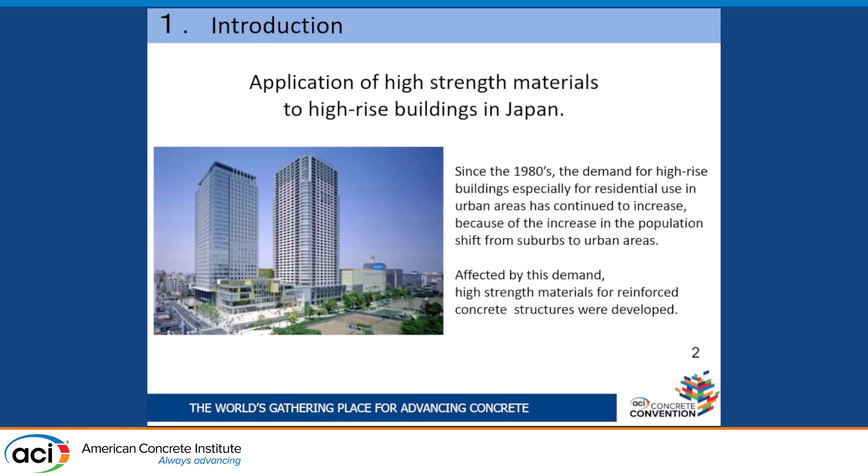I will explain the background of using high strength materials in Japan. Since the 1980s, the demand for high-rise buildings, especially for residential use in urban areas, has continued to increase because of the population shift from suburbs to urban areas. Affected by this demand, high-strength materials for RC structures were developed in Japan. This building, I designed about 20 years ago.

A national research project we called New RC was carried out from 1988 to 1993, and this chart shows the target at that time, the concrete strength and the specified yield strength of longitudinal bars. The New RC project promoted the design and construction of high-rise buildings with high-strength materials.

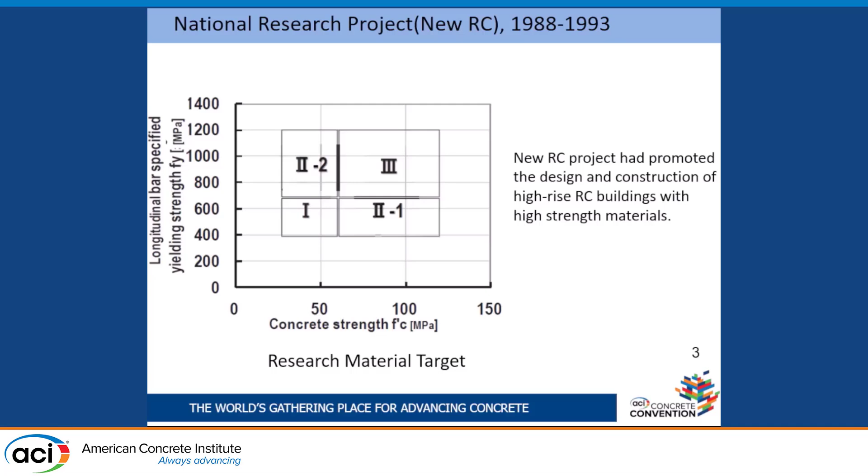This shows the history of high-strength concrete. In our company, Taisei, in the 1980s, the maximum strength of concrete was just 36 megapascal. But after the New RC project, the maximum strength went up, and in 2000 we attained 100 megapascal concrete, and also 200 megapascal, and finally 300 megapascal concrete was achieved.

But 200 or 300 is very expensive. So in Japan, usually around 100 to 150 is used for residential buildings, for the lower part of columns. At this time, big companies in Japan competed on the strength of concrete. Our company and another company competed over which company attained the maximum strength. Finally, both companies had experience with 300 megapascal. So the fight was over.

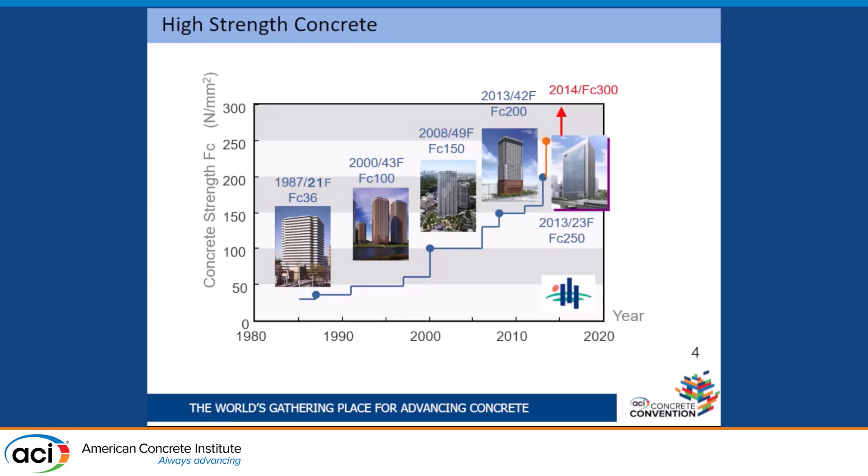This is a chart of high strength steel in Japan. Large diameter rebars with strengths of 390, 490, 590, and SD 685 are used for main rebars here. And PC steel bar and SD 785 are used for lateral reinforcement here.

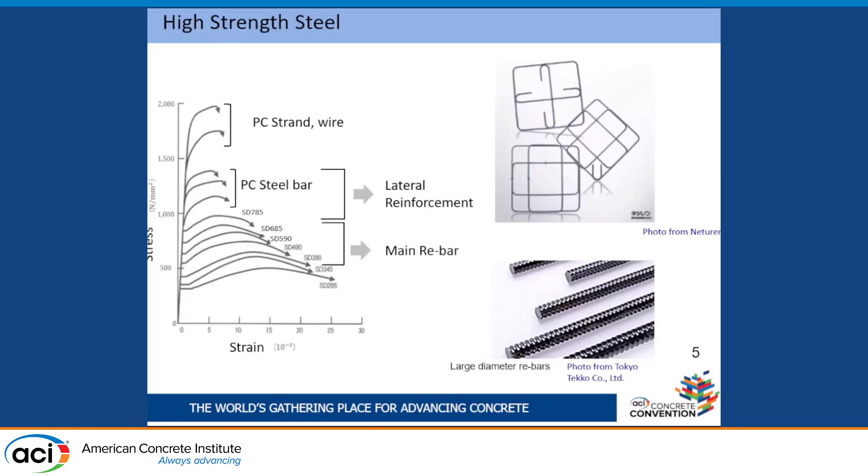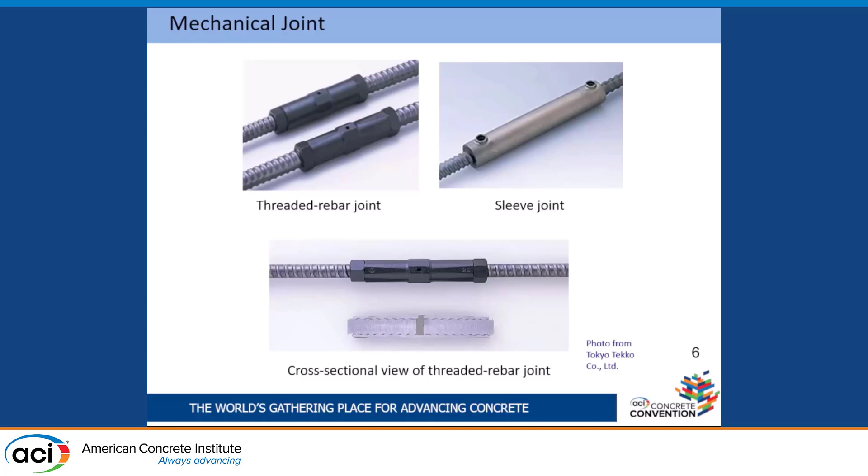When we use a large diameter rebar, we usually use a mechanical joint. There are two typical kinds of mechanical joint. One is the threaded rebar joint. This rebar is threaded, and this is a section of the threaded rebar joint here. And also the sleeve joint is here. I think the sleeve joint is also common in the United States. But in Japan, we use mechanical joints a lot.

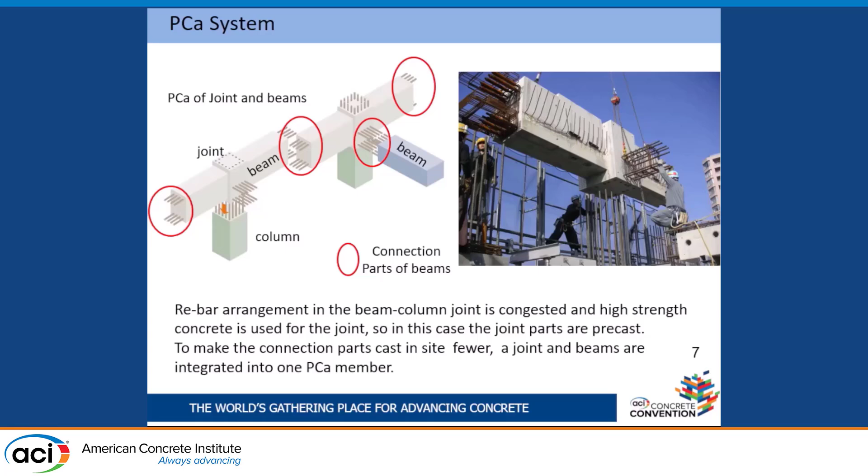Next, I will explain a precast system in the building field. Rebar arrangement in a joint is often congested, and high-strength concrete is used for the joint. So in this case, joint parts are precast. And also, to make the connection parts cast in site fewer, a joint and beams are integrated into one precast member. This is one precast member, and this picture shows the precast member about to be set here, and this is a hole, and then we pour cement grout here.

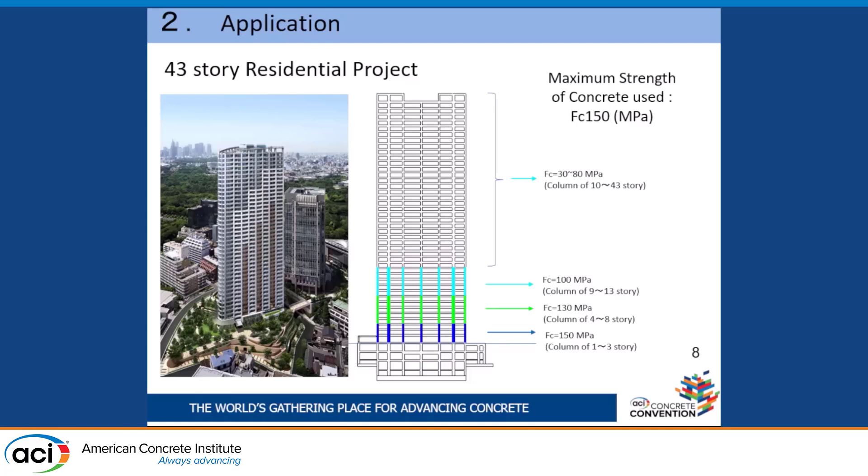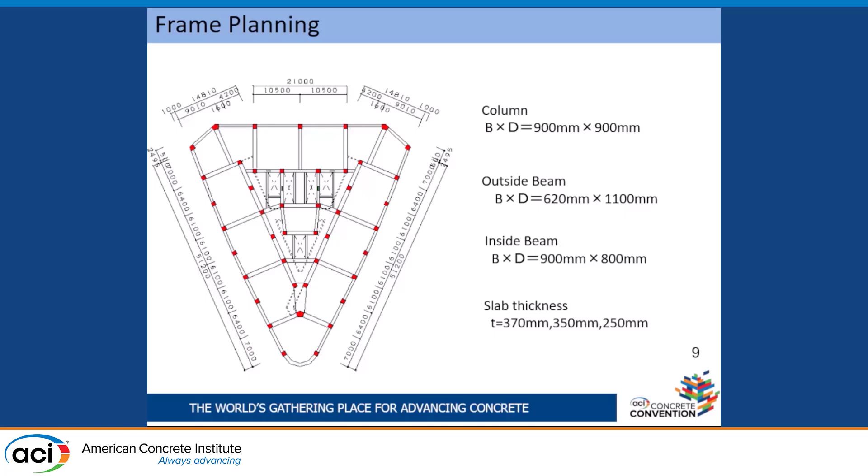This is the frame planning of this project. These are the residential areas. To make the residential area spacious, the span is wide, and the depth of the inside beam is limited to 800 millimeters, and instead the depth of the outside beam is 1,100 millimeters in order to make the frame stiff. This is a chart of the detail of the beam-column joint. To avoid congestion of reinforcing, we use a large diameter rebar with high strength.

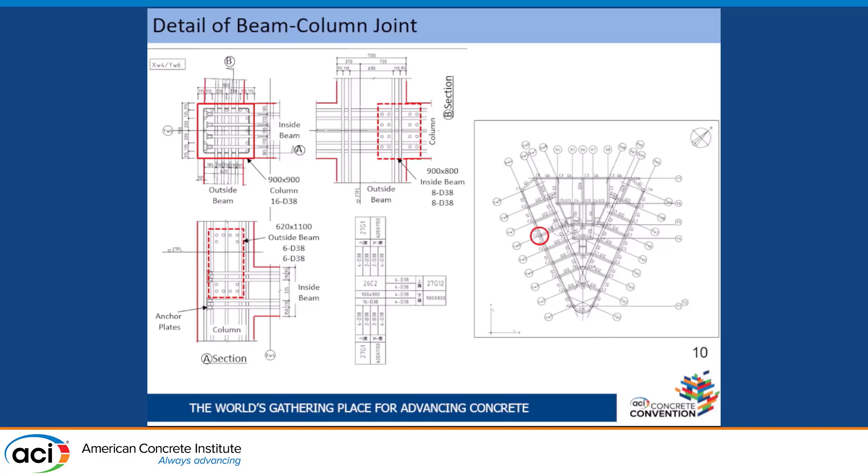So next I will explain the seismic design. The performance-based seismic design was conducted using pushover analysis, that is static nonlinear, and dynamic analysis. A 3D frame model was used for pushover analysis, and a lumped mass model is used for dynamic analysis. This chart shows the result of static analysis and dynamic analysis. The skeleton curve of the blue line shows the relation of story drift and story shear force of each story. And the dot shows the maximum response of story drift here.

We use 6 kinds of excitations of earthquake of level 2. Level 2 has a return period of about 500 years. So we check this value, and this value is less than 0.01. This is the criteria of level 2. So the criteria is satisfied. And the black one is a recorded excitation, and the white one shows the artificial earthquake.

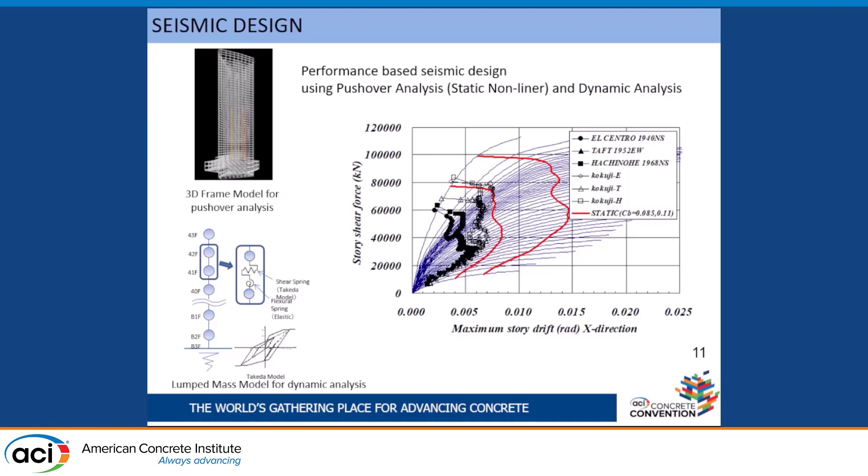So finally, I would like to introduce the recent innovative research and application about seismic performance technology. Generally speaking, if the column is not enough stronger than the beam, the joint will be damaged before the strength of the frame is attained. Here, the strength is almost the same, column and beam. In this case, the joint might be damaged like this. To avoid this damage, the column should be much stronger than the beams, but in this case, the dimension of the columns will become larger.

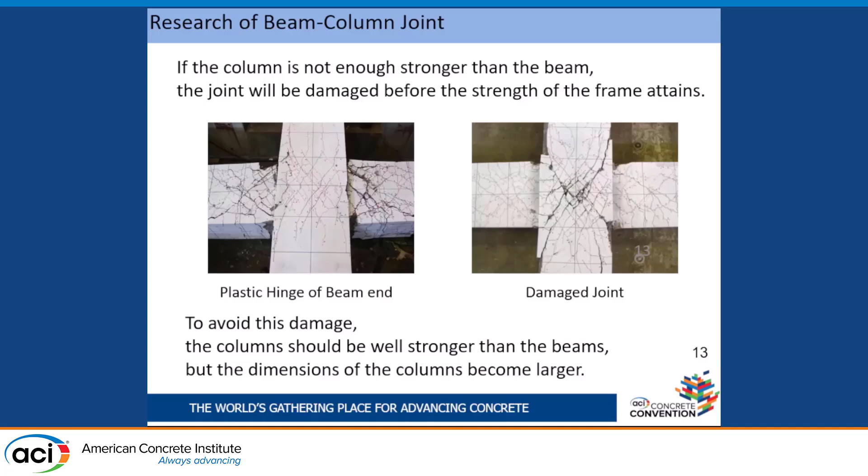So to avoid the damage of the beam-column joint rationally, the hinge relocation system was developed and introduced, where the plastic hinges are designed at the relocated position of the beam. In a conventional system, the plastic hinge position is the surface at the end of the beam here. But in the hinge relocation system, the position of the plastic hinge is relocated, shifted to this position by using a high strength rebar and also a mechanical joint here. This is the concept of the hinge relocation system.

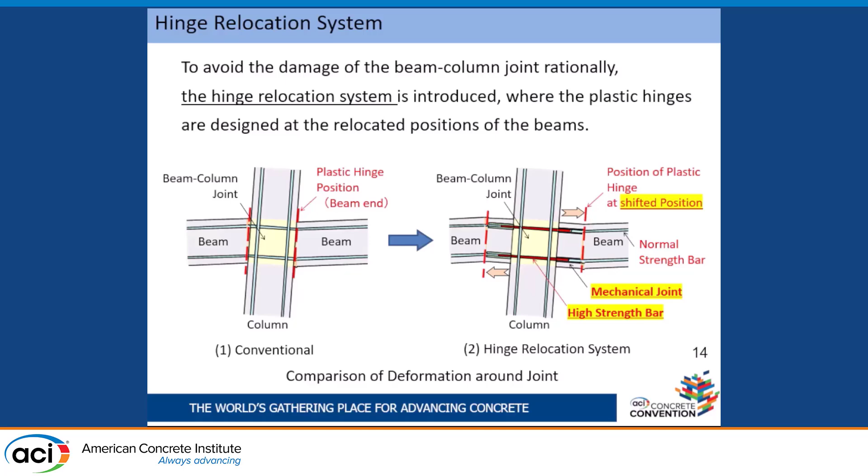So we conducted a structural experiment of the hinge relocation system. As I explained, we use a high strength rebar here, and we use a mechanical joint here, and this is the position of the hinge relocated position here. So we observe the hinge here, and cracking is here, but only small cracking was observed in the joint here.

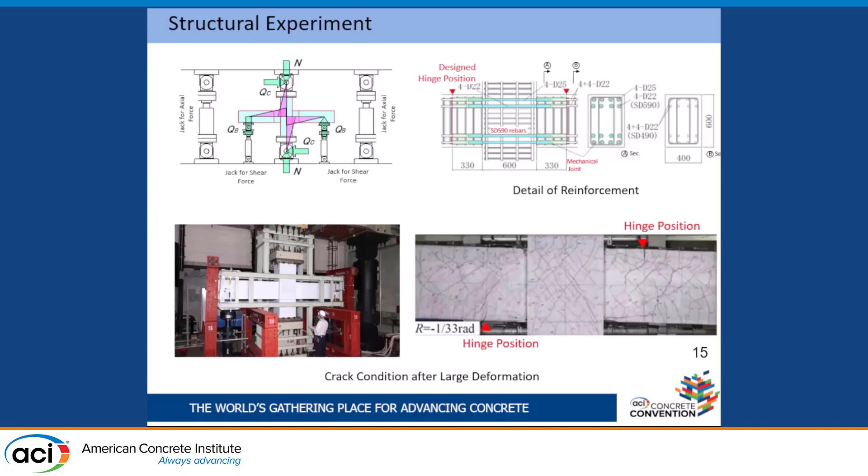So we applied this hinge relocation system to a practical project. This project is now under construction, and the site is Sapporo City, a northern city in Japan. The usage is residential. The number of stories above the ground is 48, and the total height is 175 meters. The maximum strength of concrete is 100 megapascal. So as I mentioned, the features are the hinge relocation design method, and also separated precast columns and beams.

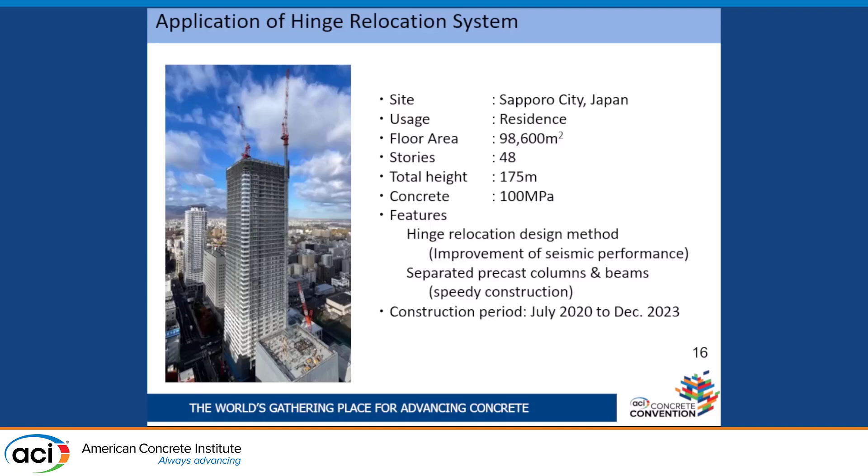We use high strength concrete, 100 megapascal, for the 11th floor and below, and the newly developed hinge relocation method is applied for the joints from the 5th to 44th floors. And to make the seismic performance better, we put in a damping device here. The damping device is this steel stud column using a low yield steel in the web, this web part.

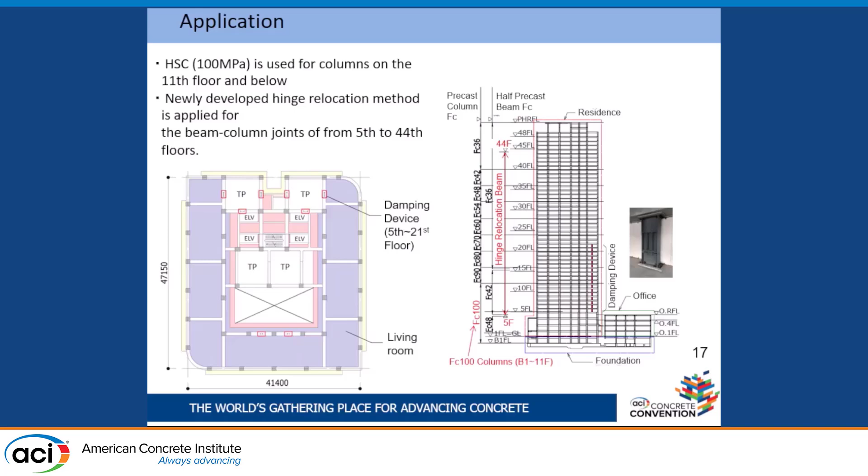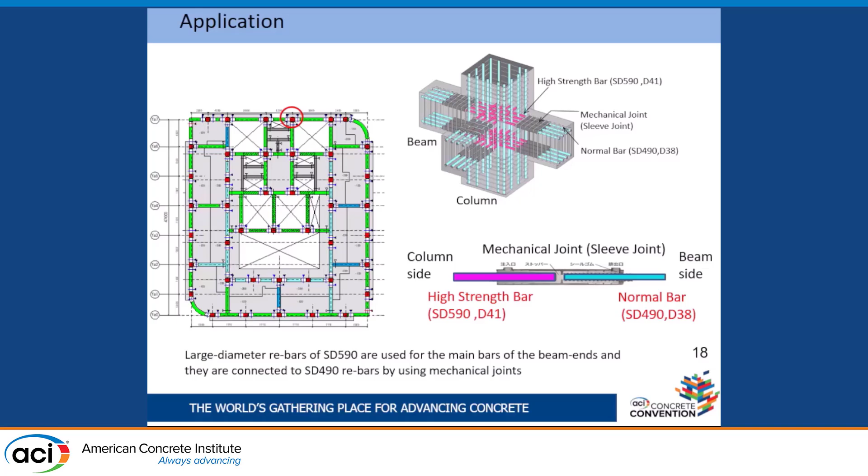So this chart shows a layout of the precast. Red ones show columns, and blue and green ones show beam precast. This is a detail of the beam-column joint here. We use the pink one. It shows a high strength bar, SD 590, and we use a mechanical joint here, and a normal bar, whose strength is SD 490, here. So this part is the critical section, the hinge relocated hinge position.

Next, I will explain precast construction. In a conventional precast construction, joints and beams are integrated in one precast segment. So in this case, the rebar arrangement and formwork are very complicated. So this has a disadvantage, and also the extension of the beam rebar is large, 1,000 millimeter. So this has a disadvantage in manufacturing and transportation.

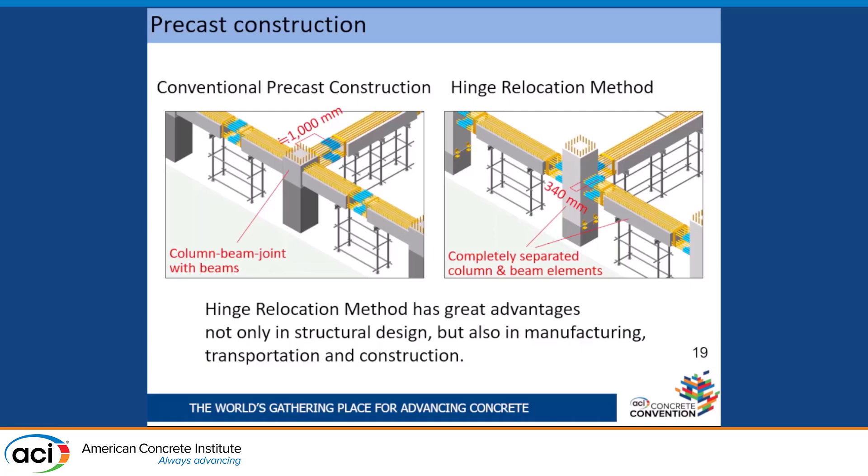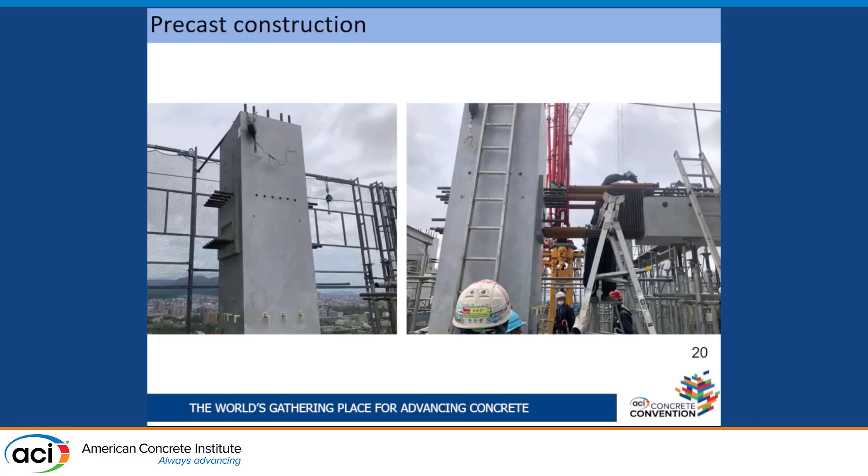But in the case of the hinge relocation method, column and beam elements are completely separated, and the extension of the rebar is small, 340 millimeter like this. So this has advantages in manufacturing and transportation and construction. This is a photo of the construction site, and this is a column, and the extension is very small, and we use a mechanical joint here, pushing to this side, and pour mortar here. This is a scene of setting the column using a crane.

So in summary, the recent application of high-strength materials to high-rise buildings in Japan was discussed. In order to make the structural seismic performance higher, the hinge relocation system was developed and applied to a high-rise building in Sapporo.